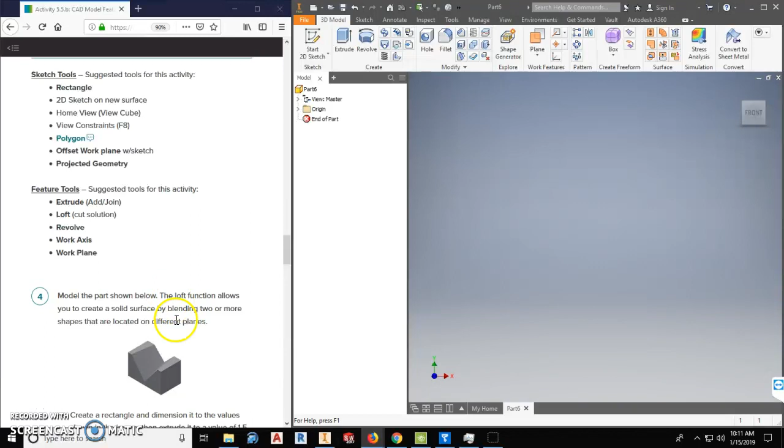This video is for number 4 of 5.5b. It's the Loft. So this is a new command that we have not used yet. I'm going to go ahead and first create a sketch of this rectangle and extrude it to a depth of 1.5 units deep. So I'm going to go ahead and start that first. And the loft is going to be a cut that we end up cutting out of this rectangle.

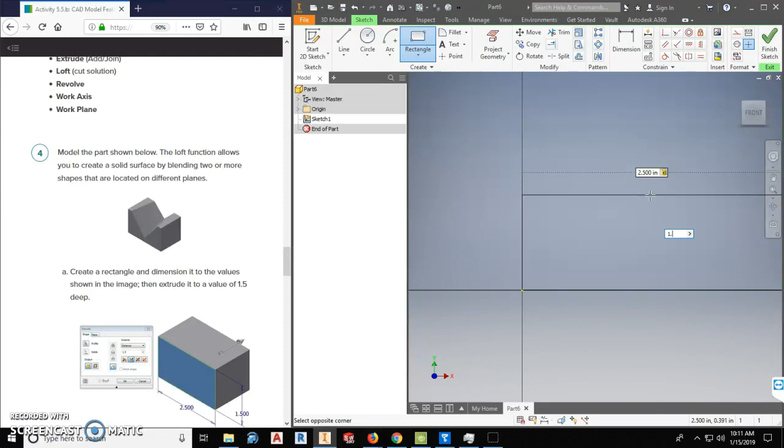So I'm going to go ahead and grab the front plane, draw a rectangle. I'm going to start at the origin, so the length of that rectangle is 2.5 units. I'm going to hit tab, and the height of that rectangle is 1.5 units. Now I'm going to zoom out, finish the sketch, and then extrude it to a value of 1.5 units as it shows here in the lesson. So extruding 1.5 and hit enter.

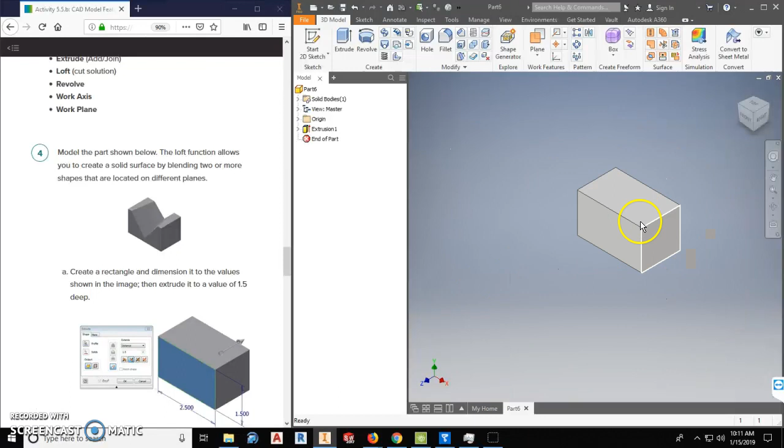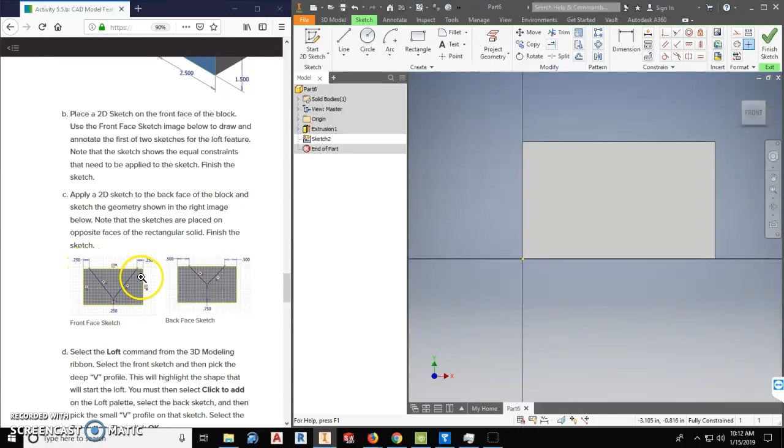I'm going to use the home button to reposition that. I like zooming out a little bit to see it a little better. Now, we need to place 2D sketches on the front and the back. So my first 2D sketch, I'm going to go on the front here. I'm going to start a sketch there and zoom in so I can see a little bit better. And I'm going to click this right here in order to get my sketch set up, and I'll zoom in so it's a little easier to see.

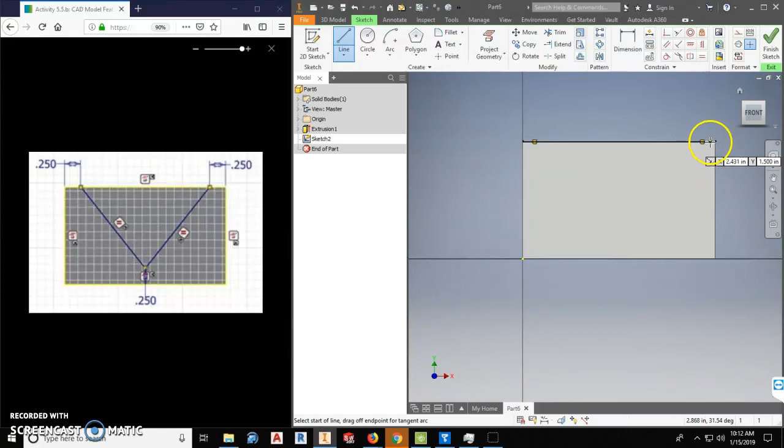So I've got a triangle that's 0.25 from the sides and the bottom. So I could just come here and do polygon and choose 3, but really I think the easiest thing is to just draw a triangle with the lines. So I'm going to come across. I'm not worried about position right now. I'm not worried about placement. We're just going to get the actual triangle first.

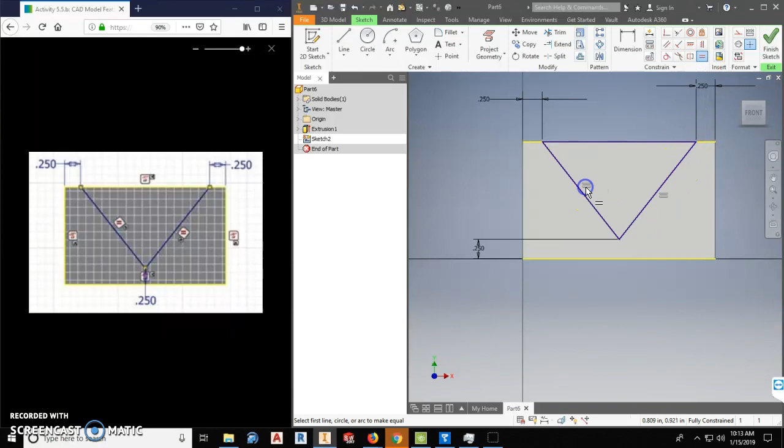I'm going to use dimension, point to point. This is going to be 0.25. And point to point. This is also going to be 0.25. And finally, the bottom point to the bottom edge is 0.25. Now you'll notice my triangle is not equal. There's a few things that I can do for this. What I'm going to do is I'm just going to hit equal sign and make these two lines equal. That's going to fully define it. This is directly in the center, and now I can finish the sketch.

To do a loft, you must have 2 sketches, kind of like a sweep on the paper clip that you did earlier. So I'm going to close out of this, go to the back face sketch. I'll zoom in so we can see that a little bit easier as well, and rotate to the back side so I can click the back face and start a new sketch. This is a little bit smaller. I'm just going to draw a triangle once again, making sure I'm right on that edge.

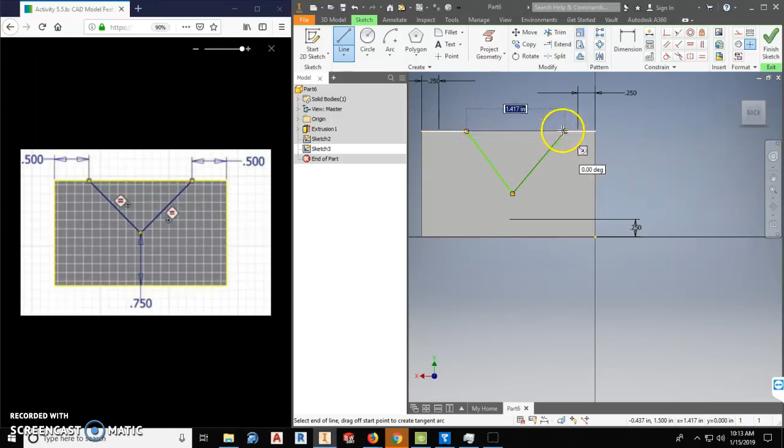Again, when I'm drawing this out, I'm not terribly concerned about exact placement. I'm simply getting it placed in, and I'll use dimensions, point to point. This is going to be 0.5. Point to point. This is also going to be 0.5. And the bottom is 0.75. So I'll click the bottom and the bottom edge, make that 0.75.

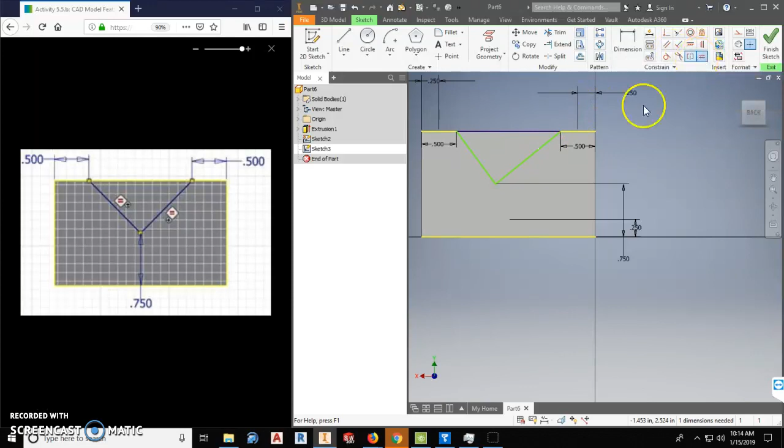And again, to make these equal, make it centered, these 2 lines with the equal constraint, I'm going to click that line and that line. So I'm all set. Okay, so I've got 2 sketches ready to go. Now we're going to do the loft. So, loft is located in the Create panel. So loft is right here. I'm going to go ahead and click it.

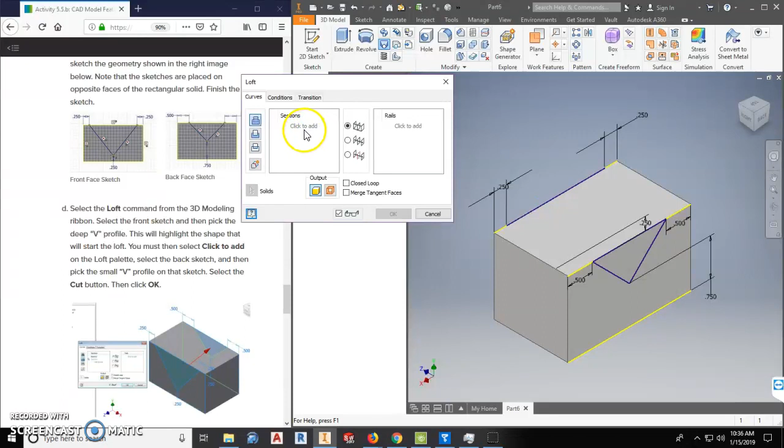And within this, we've got to pick out the sections. So it's really important that we have fully defined regions to pick from. So to add sections, we can click this. And I'm going to select a sketch. It's going to be this sketch right here, sketch 3. Click to add another, and I can zoom around to the other side and choose sketch 2, or I can pick it right here. Either way is fine. Now you'll see that I'm lofting from one side to the other. That's what these green things are for.

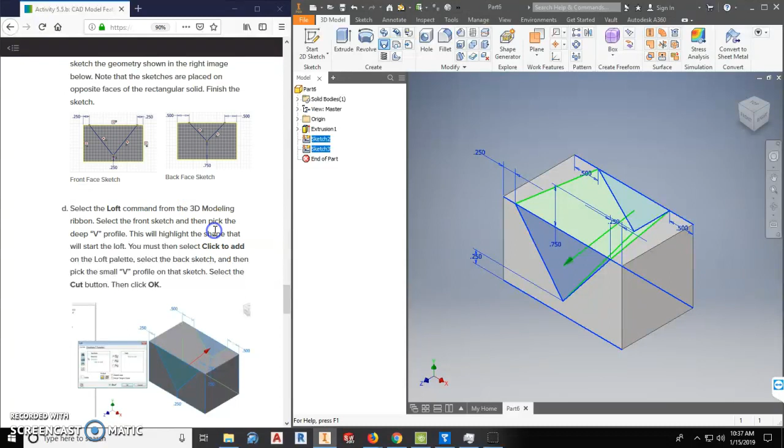But right now, it's a loft with a join. If I click OK, nothing happens. So don't worry about clicking OK. I get an error, and it's just trying to loft through a solid that already exists. So I'm going to click Edit here. And instead of joining, I'm going to cut it. Now you'll see that it's red. And when I cut with the loft, what's going to happen is it cuts out that section there.

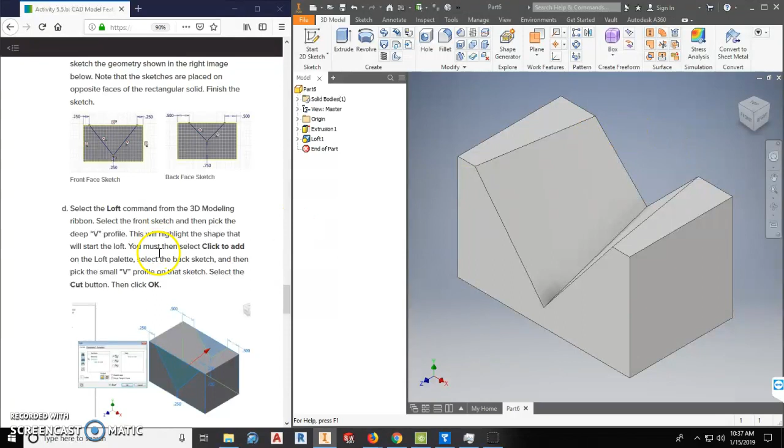So that's loft. And we can use that to cut out area from one region to another, and those regions aren't exactly the same. It's a pretty powerful tool, really neat tool that I want you to practice with.